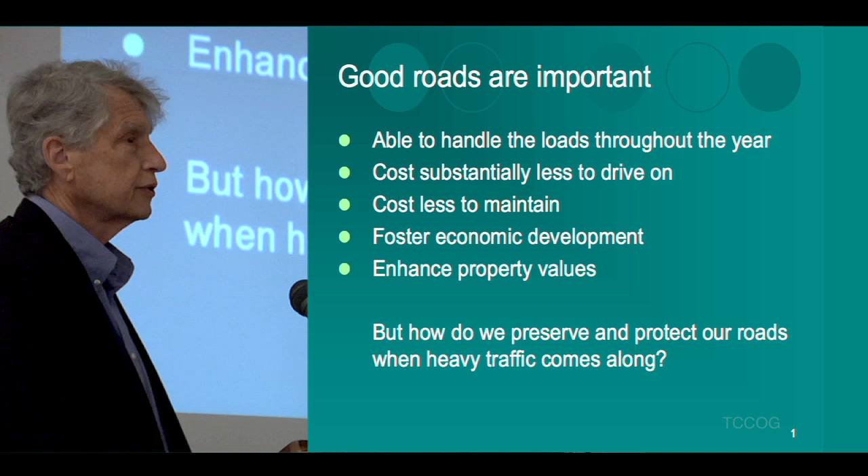Good roads cost substantially less to drive on. We refer to something called road user costs, and road user costs are how much it costs you as a motorist to go a mile down a given road. That's very much a function of the condition of the road, as well as certain things about how you operate your vehicle: how fast you go, how good the tires are, how good the shock absorbers are. But nevertheless, poor roads cost substantially more to drive on than do good roads. So that matters.

Good roads cost less to maintain. You can't totally ignore maintenance on good roads. They look pretty fine. Sometimes it's not intuitive to the public, maybe because we've trained the public to believe that the first time they're going to see the highway department is when the road's all broken up, and any high school kid could tell you that it was time to repair the road. But in fact, the least cost time to repair a road is when it's still in good condition. And then finally, good roads will generate economic development and enhance property values.

New York State is pretty well roaded. There's not a lot of new major routes that are going to be built in the future. Some subdivisions are still yet to be built, perhaps, and some standards on what the roads in those subdivisions should look like can be promulgated. But as far as adding to our road system, we've got about 110,000 miles of road in this state, and that hasn't changed much in the last 30 years, and it's probably not likely to change much in the coming 30 years. So we're pretty well roaded.

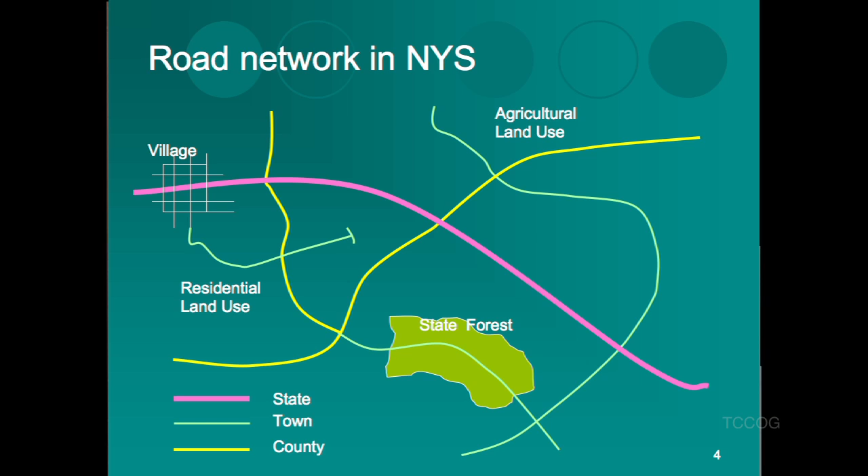And as you're going down a given road, you may be on a town road for a while and it may change to a county road. A town road could link to a state highway or it could link to a county road. You can have little villages, and villages have their own road systems, as do cities, and their own public works departments.

Perhaps near the village there's residential land use, houses fairly spaced out in the surrounding area. Get a little further out, you get into agricultural land use. Maybe up at the top of the hill is some state forest that's logged for timber and used for recreation, hiking, all sorts of different things. Maybe even some skiing in there. And the road system provides access for all these different functions.

But generally speaking, it's not straightforward. And when you're starting to figure out, well, what are going to be the consequences of traffic that was not originally anticipated at the time the road system was laid out and built, if we suddenly make a shift in the usage of that road, even for a short period of time, 3-6 months, we can use up a lot of the life of the road in a fairly short period of time if it's a weak road. If it's a strong road, like the state highway, it may not have any impact at all. You may not even notice the difference.

You can categorize roads by the administrative unit, whether it's owned by the town or administered by the town, the county, the city, the village, the state. We also use a functional classification system: interstate, arterial, collector, local. Roadside land use is another way of categorizing particularly the local road system. Local roads constitute substantially more than half of the total road system in the United States.

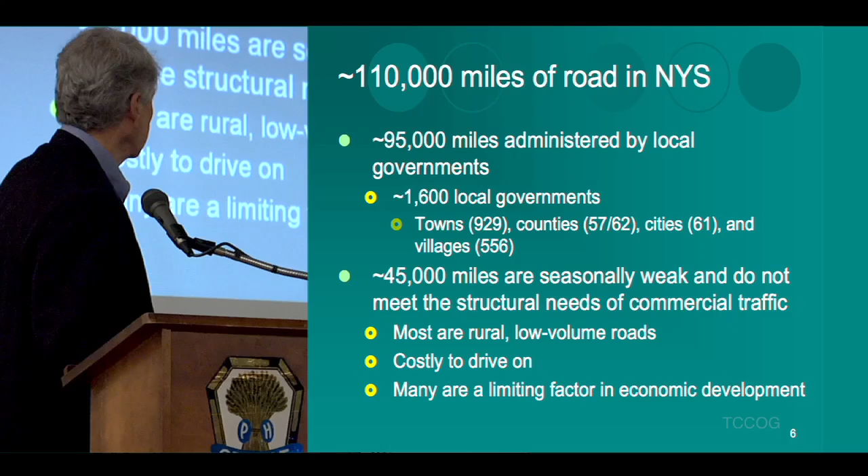So keep in mind that these roads are mostly rural. We call them low-volume roads. They're costly to drive on. Many have a limiting factor in economic development. One thing that came across my radar screen not that long ago was a time when we switched from hauling milk from dairies in single-unit vehicles, steering axle and a drive axle, to semi-trucks, steering axle, drive axle, and trailer axle.

And those larger vehicles had a hard time getting across weak bridges, weak pavements, tight alignments that weren't really ever engineered. They were roads that went from Bill's to John's barnyard and then on over to Pete's 100 years ago. And it was a pathway for a horse and buggy. And it got converted in the early 1900s into a town road. And along about 1990 or so, we switched over to using much larger milk hauling vehicles. Well, they couldn't maneuver these roads.

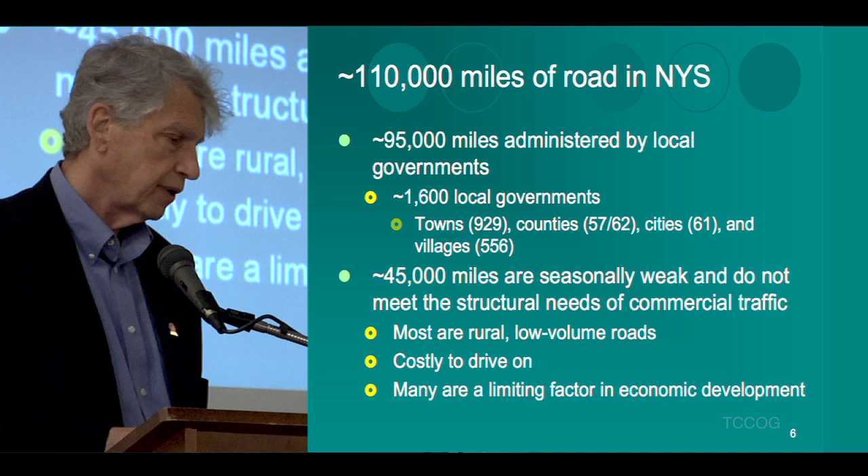So guess what? Some of you may be aware of the fact that Queen's Farms systematically dropped every dairy that was on a local road and went around signing up only dairies that were on main highways so they could get their trucks in and get their trucks out. Too bad for anybody that was in the dairying business that was off on one of these side roads. That's just one of many examples of how our road system, particularly the weak roads and the poorly aligned roads that we have, can be a factor in economic development.

How come nobody's interrupted me yet? Too early in the morning? Okay, let's do something together. I want you all to say the word something. Ready? 1, 2, 3. Something. Now you can go back and say you said something at the meeting. All right.

So, state highways. Generally speaking, the alignment of state highways was engineered, meaning that the layout, the alignment, its curvature, vertical as well as horizontal, was calculated. Pavement thickness was calculated. The traffic was determined and predicted in advance. And the pavements were designed to support a substantial number of very heavy vehicles.

Yes, sir? One question. So there was a report that came out some time ago from the New York State DOT predicting a certain large cost to the state due to heavy truck traffic. How does that jive with your statement that the state highways will be relatively unimpacted? What costs were they looking at? I suspect what you're thinking about was associated with the garbage hauling up into, where is it, Cayuga County, I think? No, this is a quote-unquote leaked document where New York State DOT was looking at the impact of frac trucks. Of frac trucks?

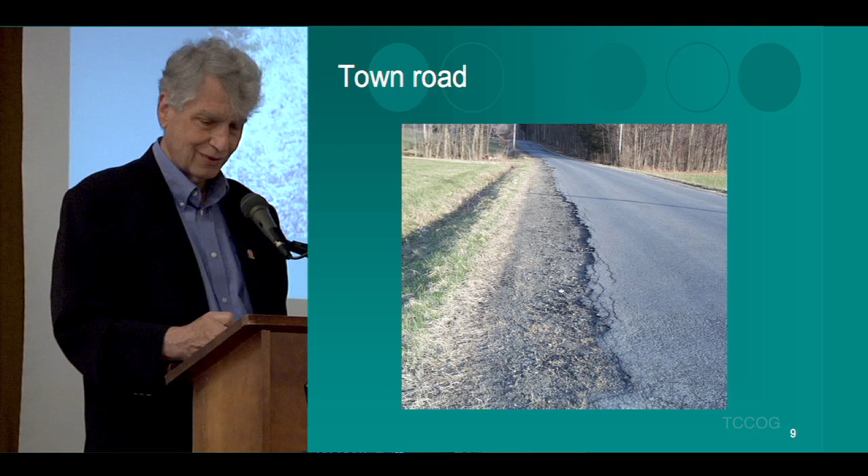What may not be obvious is water that runs off that road has a hard time getting into this ditch because of the accumulation of sand from winter operations of salting and sanding, and the grass grows up through it and actually causes the ditch to move over to right along the edge of the road, which is not a major enhancement of the lifetime of the road. Road strength isn't constant throughout the year. That's a principle that I'd like you to remember.

Local roads often are seasonally weak due to poor drainage, due to the use of low-quality materials. What do I mean by low-quality materials? Well, sometimes we open up a gravel pit and it's got a lot of silt and clay in it. Not ideal for serving as the base course for a road. It might have been fine once upon a time when that road was a gravel road. It had to have some silt and clay in it to hold the larger stones in place, give it a little bit of abrasion resistance and so on.

But it wasn't paved, so any moisture that got in there could come up through, the road could breathe, and it would evaporate away. Enough fines in there to shed water so that water didn't penetrate going down from above too much. But then we pave over it. We say, let's pave our roads. So we get out there and we put a thin surface, just a membrane.

And you've all had the experience of laying a tarp or a tent or something like that out on your lawn overnight in the summertime. Next morning you get up and you lift that tarp up, and what's dripping from the bottom side of the tarp but a whole bunch of water, right? So that's evidence that that water comes up. When it hits an impermeable surface like the plastic tarp or a sheet of paper or whatever, it condenses in the cool air and makes the area right beneath it very wet.

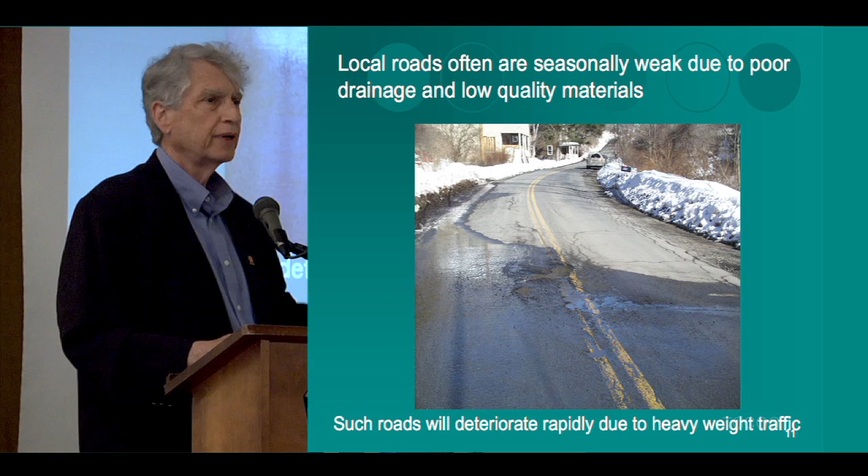You put together the combination of water and high fines content, high silt clay content of the materials, and you wind up with a situation where the bearing capacity, the structural supporting strength of the material, is very poor. So such roads deteriorate rapidly, especially if you have heavyweight traffic. And so we'd like to avoid creating any more of these if we can. What do we do about it? Well, we have to pay attention to the drainage needs of the road. Putting out cones doesn't make the water go away. We need some downhill.

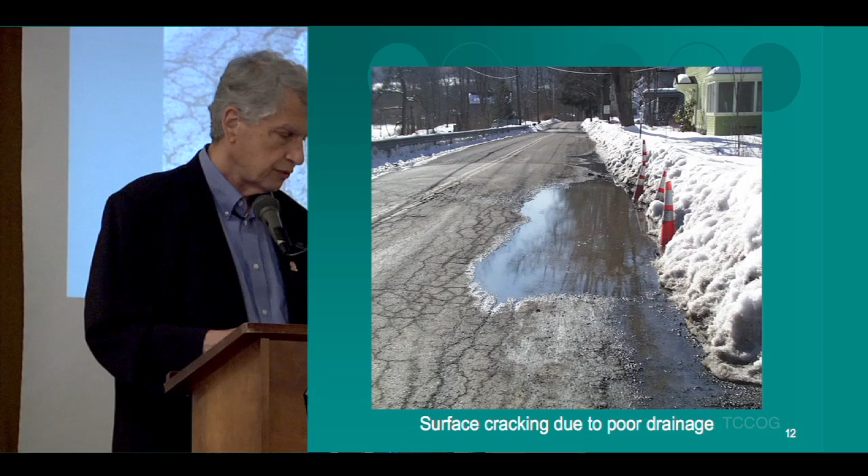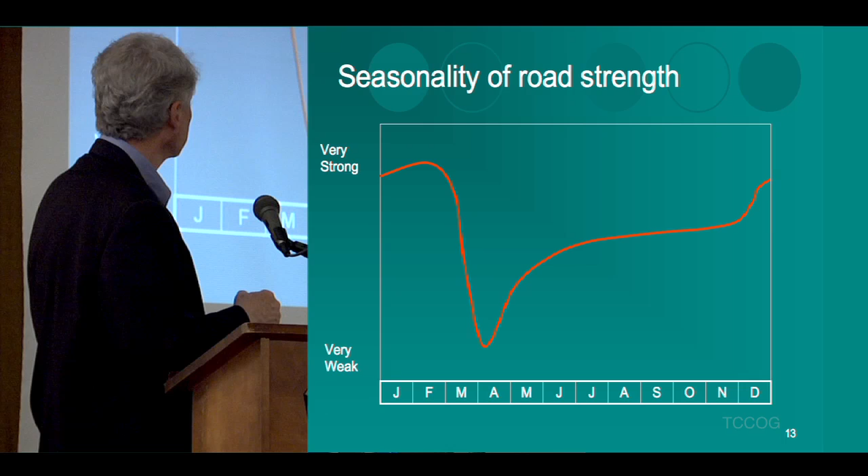You can see that the water has caused regional cracking in the area of the surface because of the combination of water and weak materials beneath the surface. And spring thaw aggravates that situation quite a bit. This is sort of a concept of how road strength or bearing capacity or load supporting capability varies with time of the year here in New York State. If we go from January to December, when the ground is frozen, the road is beaucoup strong, very strong.

Probably can't hurt it with the biggest loads you could throw at it. But then we get into a period of weakening with that interaction between water and thaw. Generally roads thaw from the top down as well as from the bottom up. And so you wind up with a situation where there's high moisture content in the road, and then a still frozen zone, and then a never frozen zone. And that still frozen zone prevents water from going down, and it's usually too cool to promote any evaporation of consequence. And so it's sort of like trying to drive a truck on a waterbed. It doesn't work too good.

But gradually over time, as we go through the spring and on into the summer, there's a continual increase in strength until we get frost penetration back down in the road again, and it goes up to very strong. That's pretty much what happens. So when we drive a vehicle on a road that exhibits this kind of characteristic, it makes a whale of a difference how much damage a single pass of a given vehicle would make, whether it was right here at the bottom of spring thaw, or whether it passed right there at the top of the frost season.

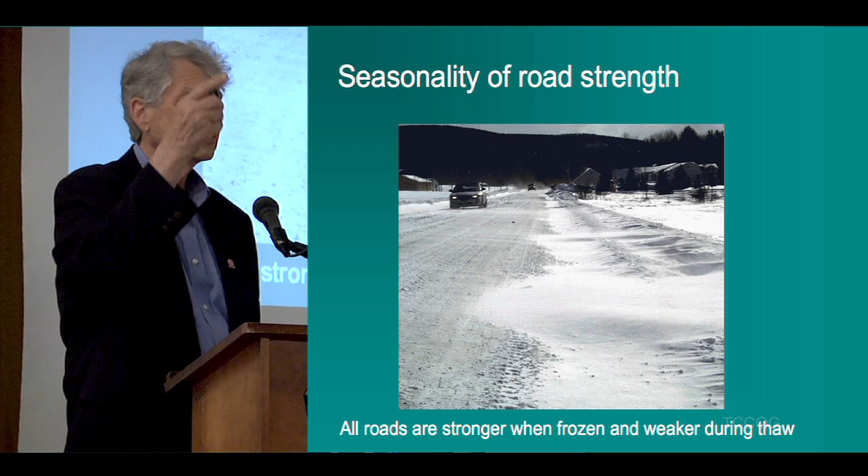All roads are stronger when they're frozen and weaker during thaw. That's true of state highways and local roads and so on. Just the magnitude of that difference between winter and summer is a lot more noticeable on local roads. So, the damage per pass of one truck is not the same on strong state highways versus weak local roads. The damage per pass of one truck is not the same at different times of the year on a given road. And thus, cost allocation, when we try to figure out what the bill to the user of the road should be, cost allocation based on the number of truck passes is a flawed approach.

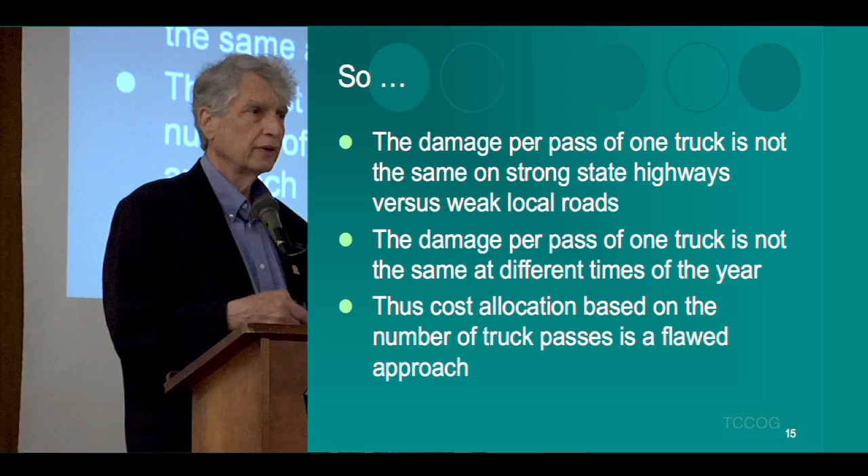And to the best of my understanding, that's exactly what Pennsylvania is using. They just said, tell me how many truck passes you're going to have, and we'll tell you how much you owe us for damage to the road. And I'm saying, well, now wait a minute. It makes a heck of a lot of difference whether those trucks went over in December or whether they went over in March as to how much of the life of the road got used. So we need to get a little bit more sophisticated, I think, than just a cost per trip or damage per pass or a cost per pass type of approach.

Roads deteriorate over time. This is referred to as the performance curve. Now our time span is in years, and that could vary from one category of road to another. For a state highway, the time from real good condition to totally gone to pot might be 30, 40 years. On that chip sealed town road that I was showing you earlier, it might be 3 or 4 years. So a lot depends on the structure that's there, what this time scale is, but all roads tend to follow this kind of a pattern: when they're new, they stay in pretty good condition for about 2/3 of the life of the road. And then the effects begin to become evident. And finally, as we get down into what we refer to as fair and poor condition, we begin to see visible distress.

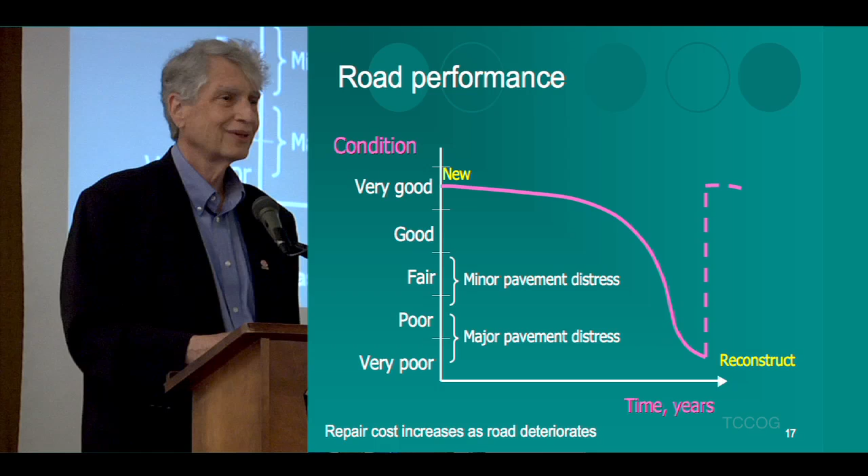Yeah, questions? So my point is that this road performance curve works for all roads, whether they're interstate highways or town roads, but they're assuming a certain amount of weight that they're carrying or a certain amount of stress that they're seeing. And if you change that stress to make that consistent between all roads, then the curve would be much shorter than it is for a town road and would be much longer for...

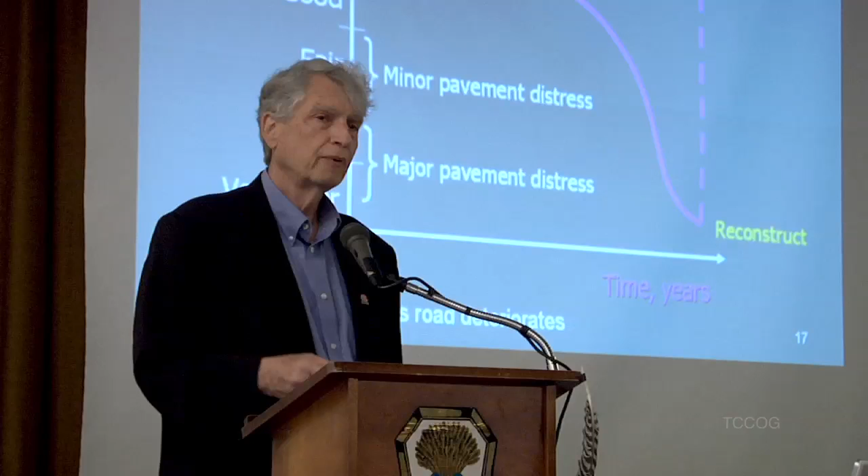As I pointed out earlier, it is the case that 15,000 miles of road that's administered by the state has a huge force of people that figure out what needs to be there. But what do we do with county roads and town roads and village roads and so on? Well, there hasn't been too much change in traffic over time. There's 1 or 2% growth per year in a high growth area and less than that in a standard growth area.

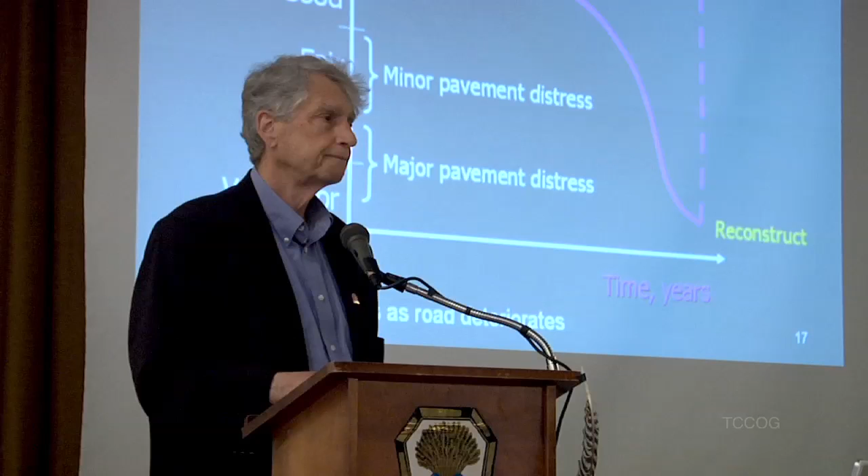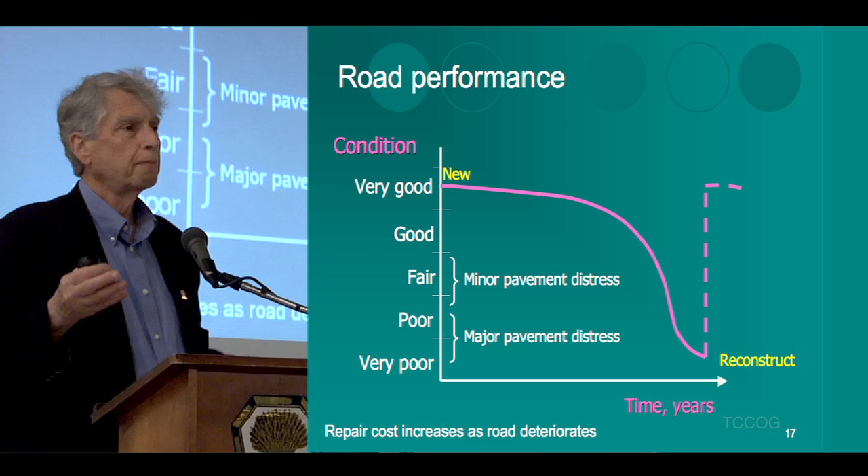So we gain from experience, and we know what we need to do, and we have a pretty good sense of how long it's going to last. So the person in charge of the road system does what is needed when it comes time to reconstruct or recondition a road, does what's needed based upon past experience.

If after that commitment has been made and the taxpayers have forked over their money to build that road, then there's suddenly a jump in particularly the heavy truck traffic, even for a short period of time, like 6 months, which is about how long it takes to develop a wellhead, you wind up with a situation where you can use up a pretty large portion of the life of a road under those circumstances. So the engineered road isn't as adversely affected as the ones that are designed by experience.

And one other follow-up question. Typically, local governments don't let the roads go all the way to the point where they need to be reconstructed. So what would this curve look like if you were to do some intermediate repair or resurfacing? Well, it depends on what you do for the intermediate repair. If you do crack filling and patching, that's not going to add much structural strength to the road. And in fact, it's probably going to add roughness to the surface.

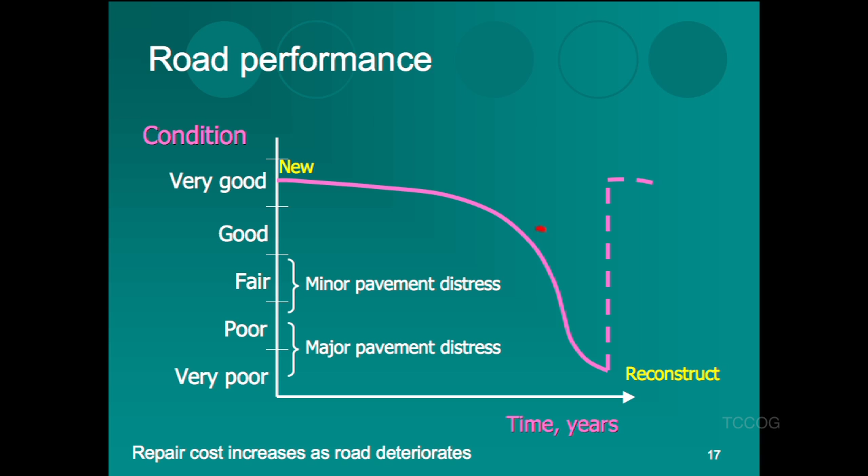Thanks. Okay. The thing I'd like you to notice is that here, the distress doesn't begin to show up until you get over into the last third or so of the life of the road. And Don's right. If you repair that road, put it back up to good again, smooth and good and very good condition, here it costs less to do that than if you wait until it's badly deteriorated and then try and do it. Yes, sir?

If I understand what you've just said, if you wanted to charge the trucker for the decrease in lifetime of the road, it would not be enough just to measure the decrease in the quality of the road. You'd have to know where on this curve you were, which might be tough to do. And there's a better curve that you could work with. We'll work our way toward that better curve here in a few minutes.

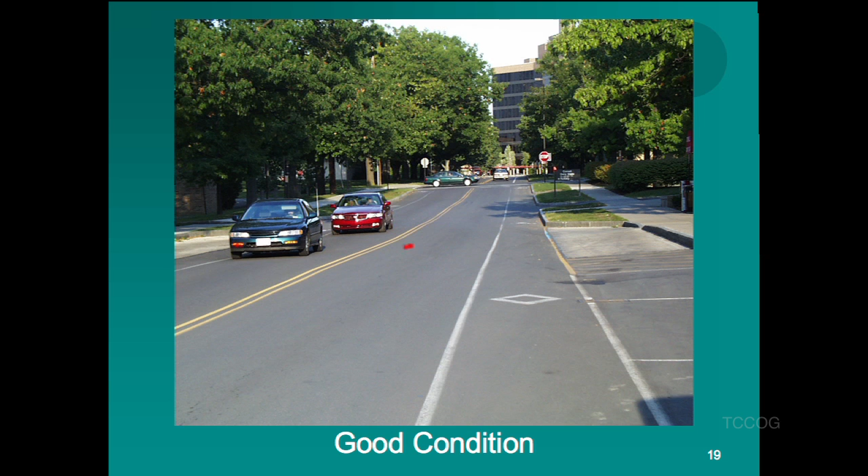Not too much different between very good and good. There's the occasional little crack here and there. If you look very carefully, you can begin to see some rippling in the surface. That adds a little bit of vibration, a little bit of roughness, a little more wear and tear on the traveling vehicles than they would have if it was perfectly smooth.

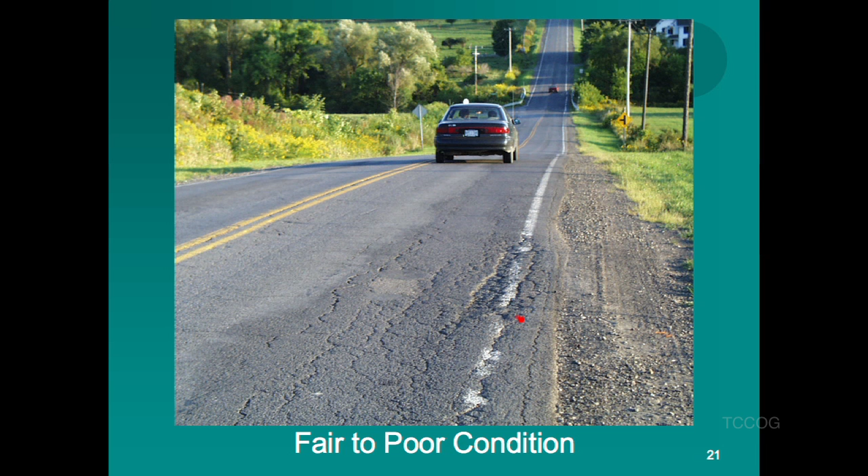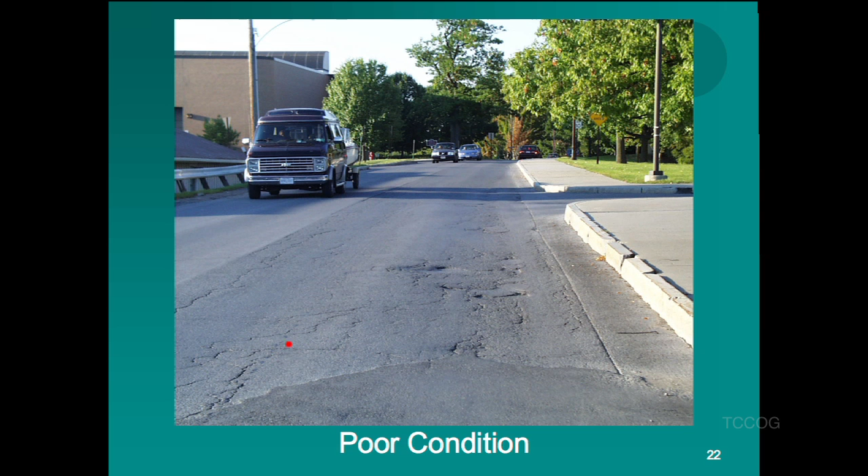This is definitely getting into the poor condition. There's a big patch that I'm standing on there, and some pretty significant roughness. Longitudinal cracking, transverse cracking, pothole. So that's about what you'd call poor.

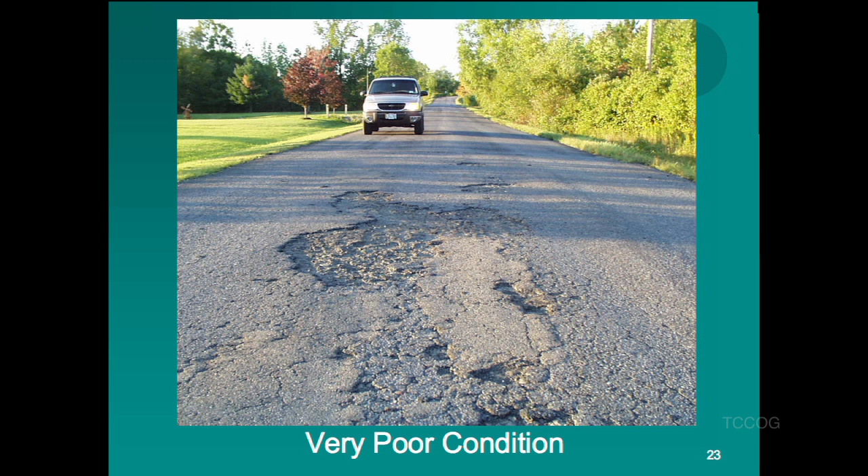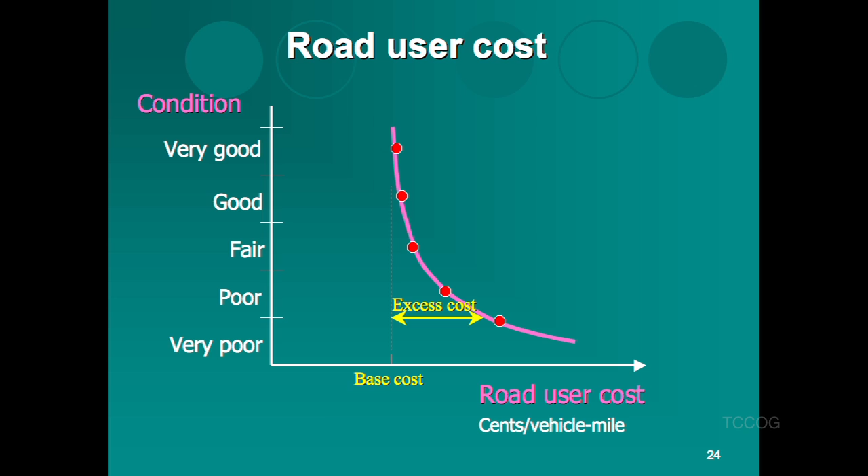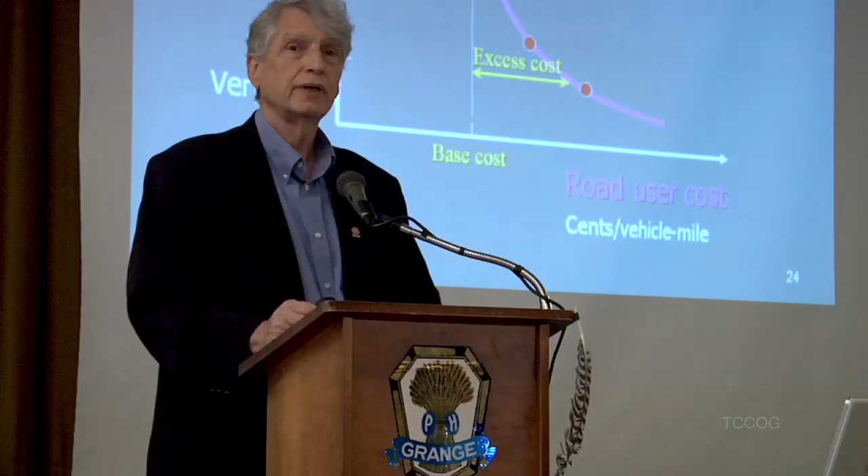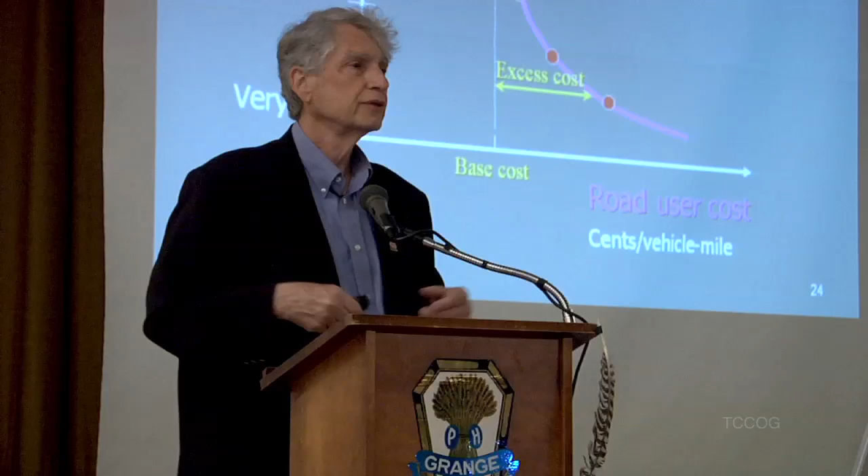Another question? So, the highway department spends money to build a road and maintain it. Road users spend money to drive on the road. Vehicle depreciation, gas, oil, tires, new shock absorbers every now and then, so on and so forth. How many here would say that the road user cost is 50% or less of the sum of the two parts? How much the highway department spends to build and maintain the road, plus how much the road user spends to drive on the road.

All the traffic collectively. 50% or less is road user costs, 50% or more is highway department costs. How many would go there? Couple. Okay. Wrong. Too low. I know, I sucked you right in, didn't I? So let's bump it up here.

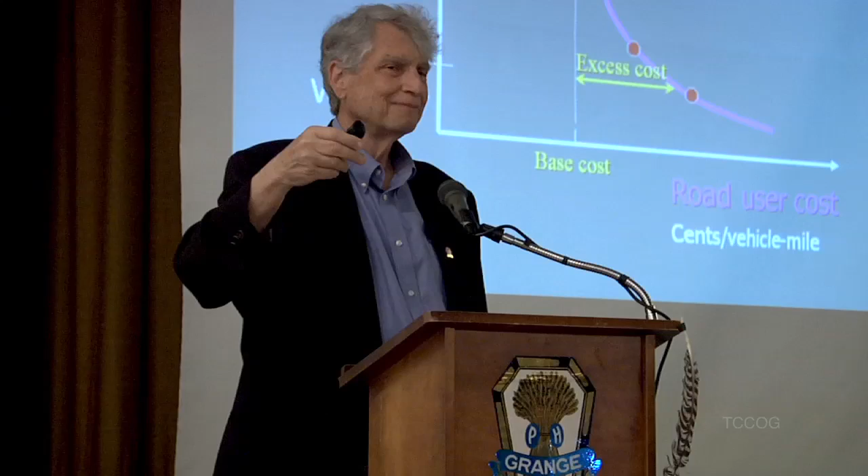I'll tell you that we're too low at 50% road user costs. How many of you would go with 75% road user cost, 25% highway department? Now how many of you have we got in the game? Plus all of those that raised their hand earlier, right? Because you're covered. Okay, still wrong.

Shall we go for 90? How many of you would say road user costs are about 90%, highway agency costs are about 10%? Show of hands. Not very many. How many of you say it's more than 90?

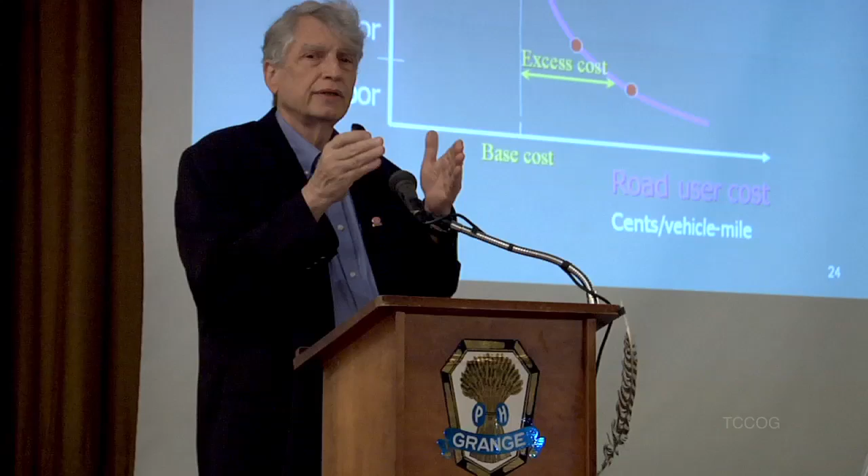Well, it doesn't make too much difference whether we're talking interstate highway or whether we're talking town road. It ranges in a fairly narrow band: between 90 and 95% of all the costs of going on a road is road user costs. 5 to 10 cents on a dollar is paid for by the agency, spread out over a substantial number of years.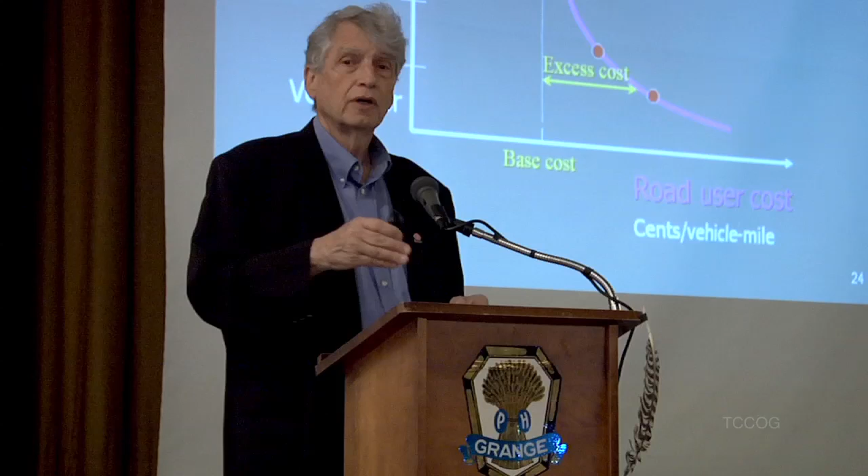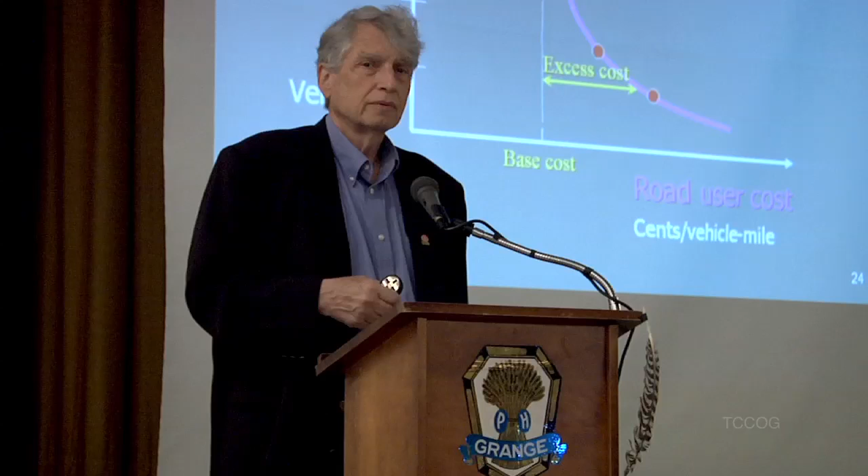And so when I see a road in very poor condition, my wallet begins to twitch and I begin to say, please, please, please spend a penny of your damn nickel to make my 55 cents per vehicle mile go down to 45 cents, if you would, please. And it turns out to be very cost effective to keep roads in smooth condition.

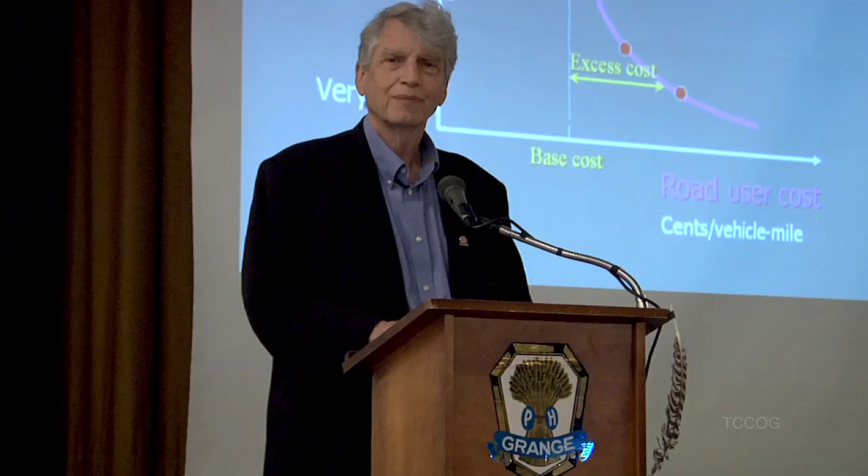But how on earth would you explain, with all the training we've given the citizens of New York State, that we don't come out and fix roads until they cause complaints? How would you explain to people that you're out there repaving a road that looks perfectly good? Be tough, wouldn't it, when there's other priorities? Those roads have to compete for funds with other priorities. So we can let it go.

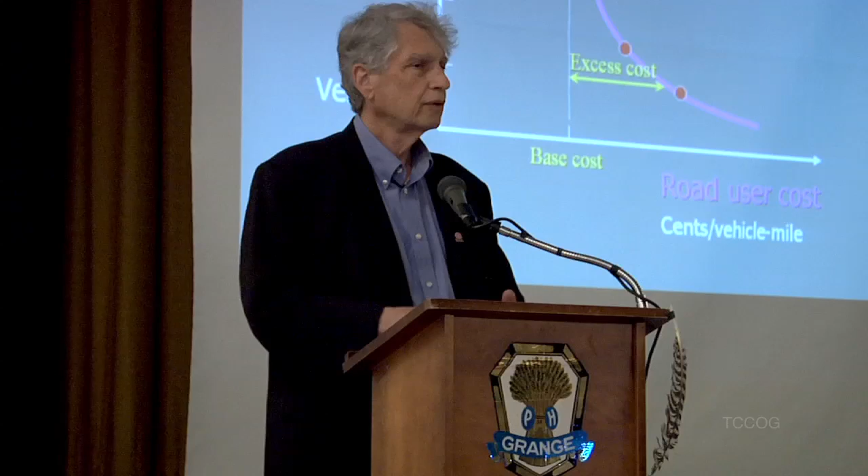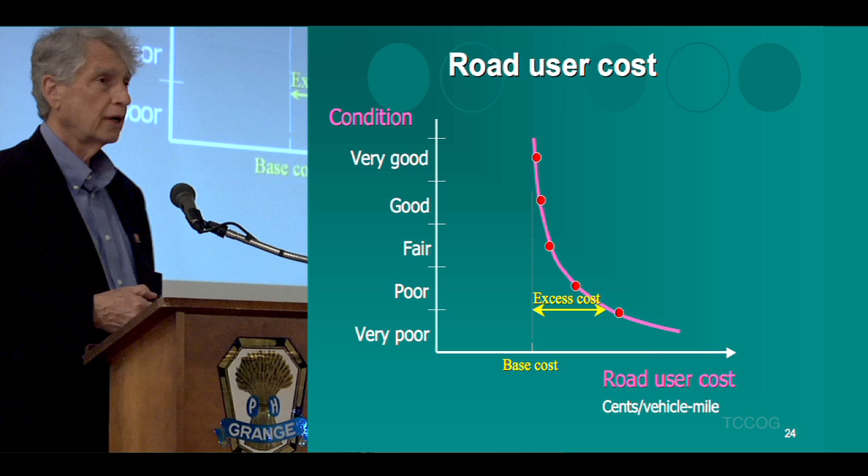But the consequence of letting it go is this excess road user cost. If the public knew what we're doing to them in terms of excess road user cost by having weak and deteriorated roads, they'd probably get pretty concerned. So I was planning on sending an article into the Syracuse newspaper to tell everybody this.

So basic engineering principles. What causes road failure? Heavy loads, lots of traffic, seasonally weak materials, poor drainage, and just the passage of time, which in engineering parlance we call cumulative damage. All of these cause that condition curve to take a dive eventually and go from good to poor condition.

What's going on in the roadway underneath the vehicle tire? Let's think of it as a truck tire. It's got a tire pressure that pushes on the surface and an axle load that pushes on the whole system, which bends the surface, bends the base course, and puts a vertical pressure on the subgrade. Heavy loads cause big deflections. Why do we care? Because big deflections cause roads to not last very long.

So why are our state highways able to withstand lots of heavy trucks and town roads aren't? Well, they put more substance in there. They typically use better quality materials, and they sure as heck put them down a lot thicker. I and my colleague David Orr have been out coring roads around New York State on state highways for a research project over the last few years.

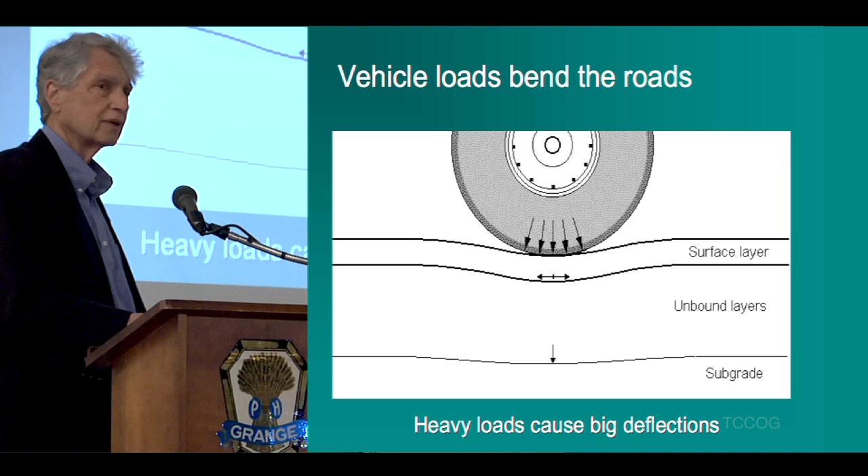The biggest that we came to was 17 inches of asphalt concrete that had been accumulated over time on roads that were perhaps first paved around 1930 or so, but you'd see a layer and then another layer and another layer, and by the time you cut a hole in it, it was 17 inches deep. And that was just the asphalt. And underneath that was a heavy layer of unbound gravel as well.

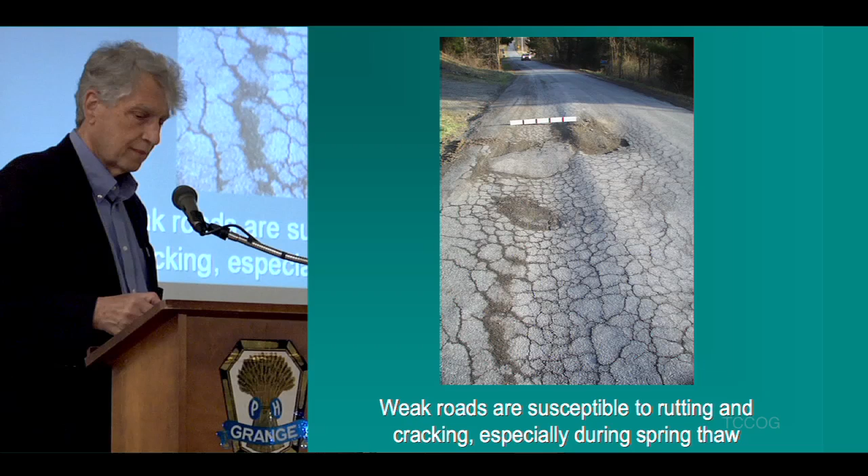So what happens when weak roads are subjected to heavy trucks at the wrong time of the year? You get rutting and cracking. And this is a particularly good example because it's got cracking and rutting and potholes and patches. By golly, this is classic. Used to have a colleague that said no student project was ever a total failure. It always could be used as a good, bad example. And I think this is, without any doubt, a good, bad example.

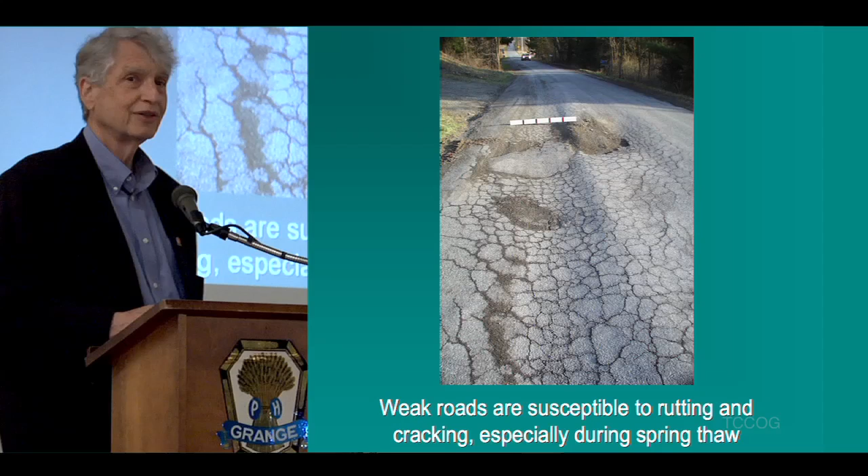So let's think about something that you've probably done absent-mindedly, just sitting at your desk. You took a paper clip and bent it back and forth and back and forth, and pretty soon you had two halves of a paper clip, did you not? Anybody here who has not yet done that? 100%. Okay, we have something we can talk about together then.

So you took a paper clip and bent it till it breaks, but let's make it a little more complicated. Let's take a dozen paper clips and have three conditions. One, we open it up to 45 degrees and then fold it back down. Take a different paper clip out of the pile, open it up to 90, bend it back down to closed. And then another one, 135, which is 90 plus 45, and bend it back down.

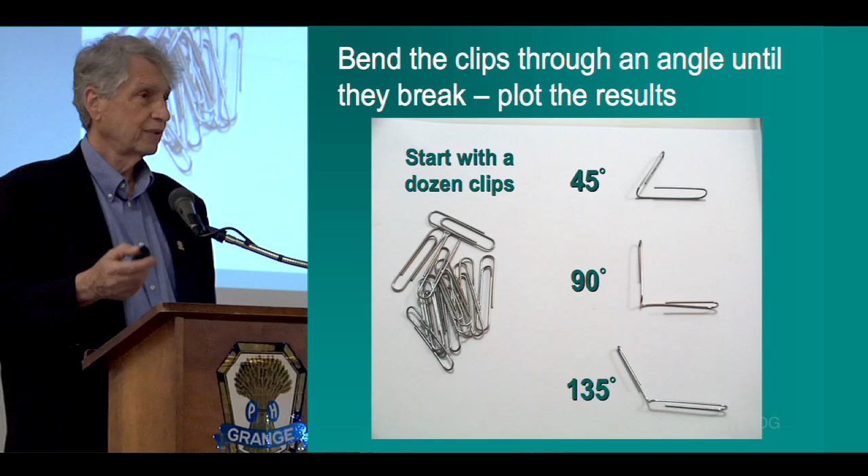What do you suppose is going to happen? Eventually, they're all going to break, but the one with the bigger angle is going to not take so long. So here's what it looks like.

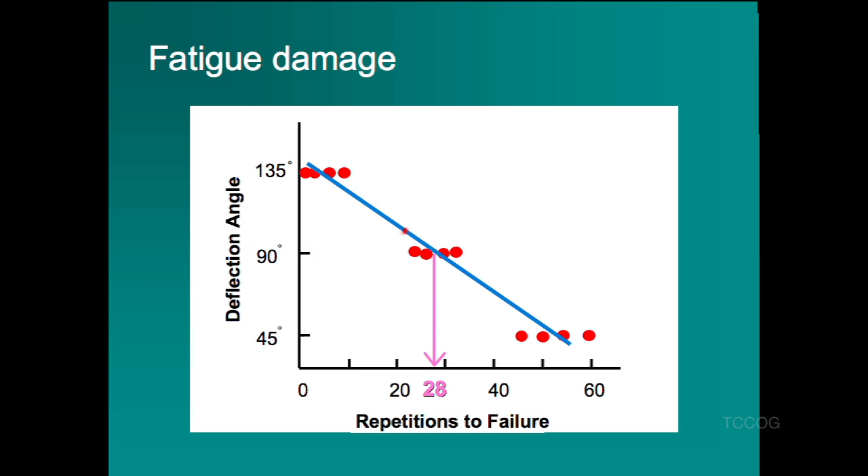At 135 degrees, just a couple of bends back and forth, and it's kaput. At 90 degrees, it lasts a little longer, and you'll notice how the data is scattered. In other words, a statistician would say it's stochastic. You don't get the same number of repetitions to failure out of every paper clip. But as a group, you can begin to find an average.

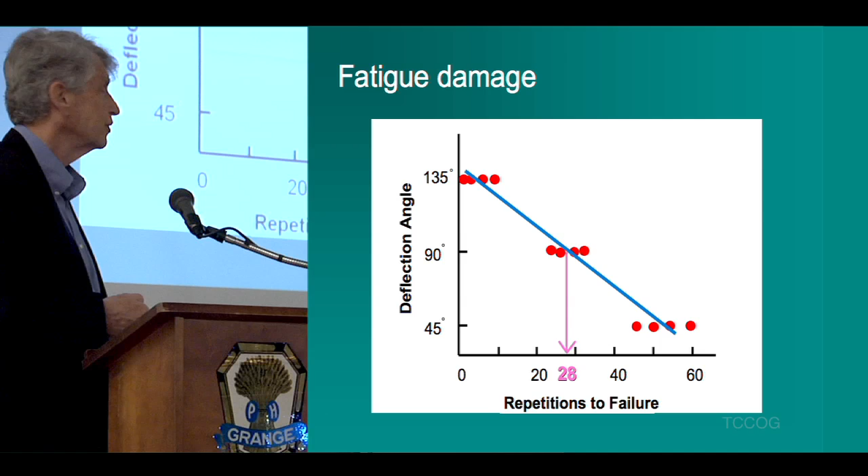So the blue line represents the average. And the average at 90 is about 28 repetitions to failure. These are the big, hefty paper clips, not those cheap little things with notches in them and so on. Okay, so now let's make it even more fun. Let's bend one paper clip 10 times at 90 and 22 times at 45. Who can tell me whether it'll break or not?

No? What makes you say no? Who said that? You're right. Here's how I know that you're right. We'll take that curve. I'll discard the data points because we don't need them. We'll just work with the blue line. So at 90, we could allow 28, but we're only going to put on 10. So 10 repetitions out of 28 allowable is 36% of the life of that paperclip.

Now we'll bend it to 45. We could expect to get 52 repetitions, but we're only going to give it 22. Remember, back here? 22 of these and 10 of those. So 22 divided by 52, and the sum of those two adds up to 78%. That's the cumulative damage. It's stochastic, so it might break at 78%, but that's far enough away from the line that I would be willing to put my money on that it wouldn't break. So you're right. You see how that works?

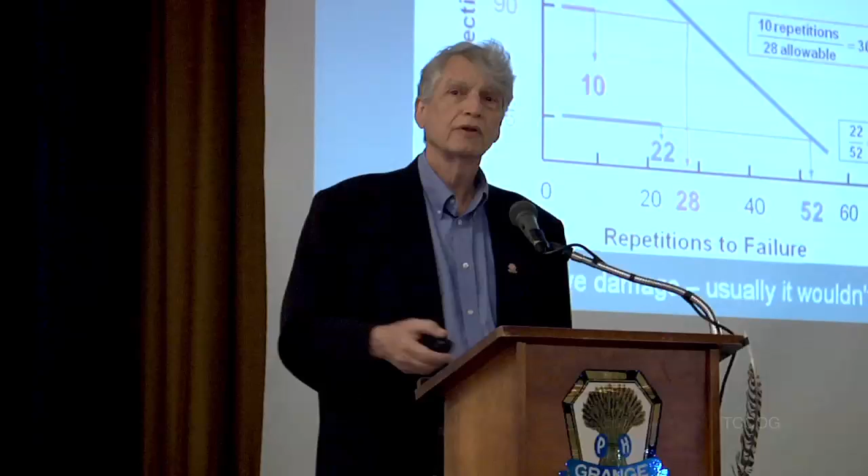This could be a heavy truck, this could be a not quite so heavy truck, that could be a Volkswagen. But depending upon the vehicle, the amount of damage per pass of the vehicle differs as a function of the loading.

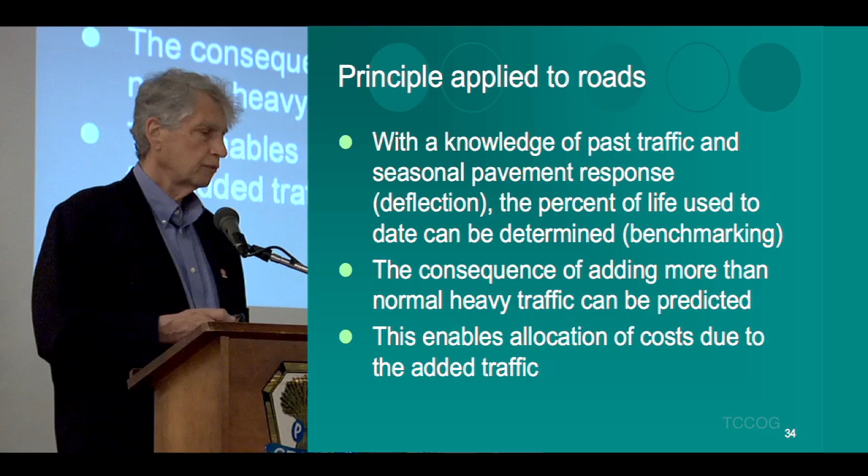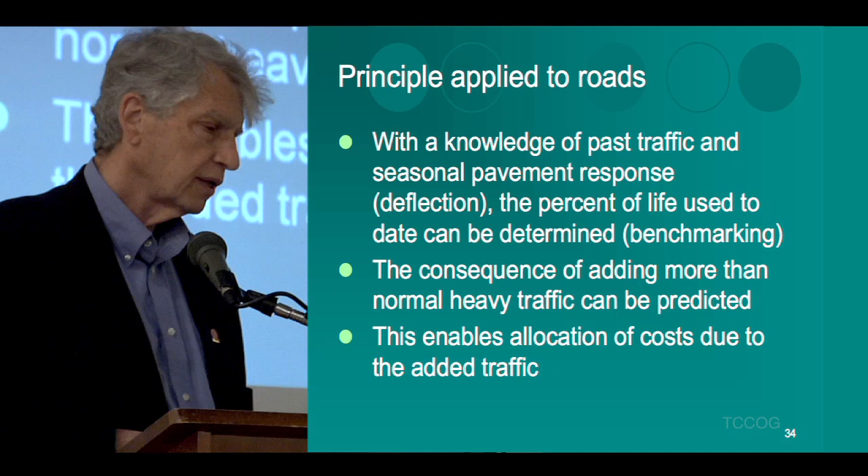So, when you try to apply that principle of the paperclip to a road with the knowledge of past traffic and seasonal pavement response, and pavement response is just fancy words for the deflection of the road, the percent of life used to date can be determined. And that is what I refer to as benchmarking. The consequence of adding more than normal heavy traffic can be predicted, and this enables allocation of costs due to the added traffic.

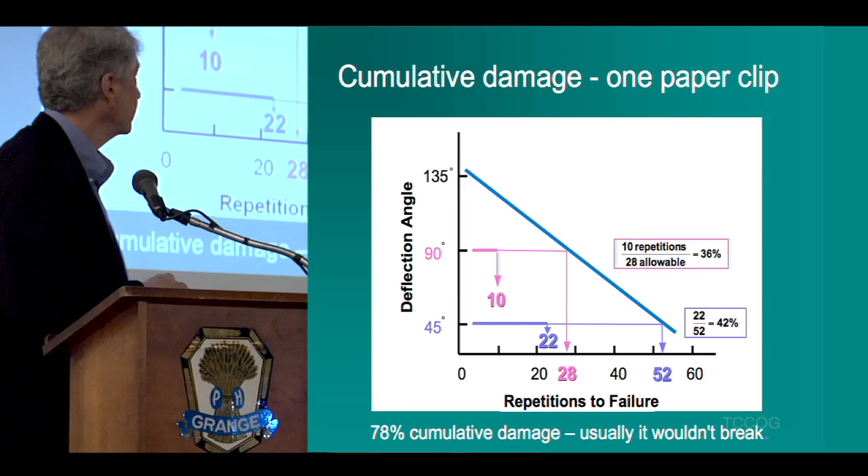Okay? So we have a mechanism here. If we have this kind of information for the materials, and if we have a means of measuring the pavement deflection or the pavement response, now we can get into something that's got some science behind it that makes it possible for us to figure out what would happen if we had a burst of heavy traffic superimposed on top of the normal traffic. And we could see how much of the life of the road is used by the heavy traffic and how much is going to be used by the remainder of the traffic.

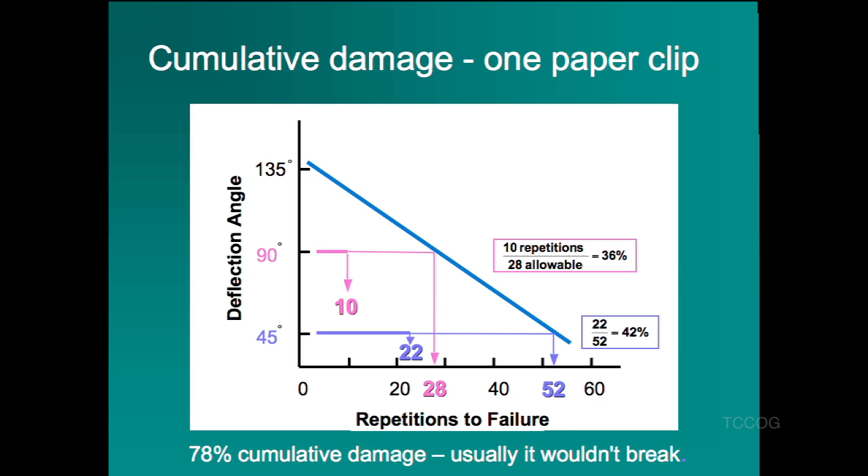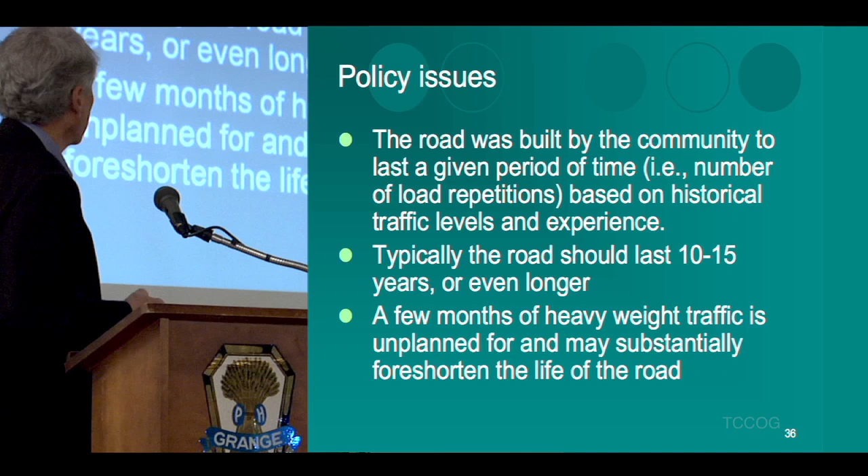Now we need to talk a little bit about policy, because while there's engineering that influences things, policy as developed by policy-making boards has an impact too. As we mentioned earlier, we got a road that's built by the community to last a given period of time. Or instead of period of time, we could talk about it in terms of number of load repetitions. One would translate to the other. And that's based on historical traffic levels and experience. So the reason why we have 3 inches of asphalt and 12 inches of gravel is because that worked over the last 25 or 50 years.

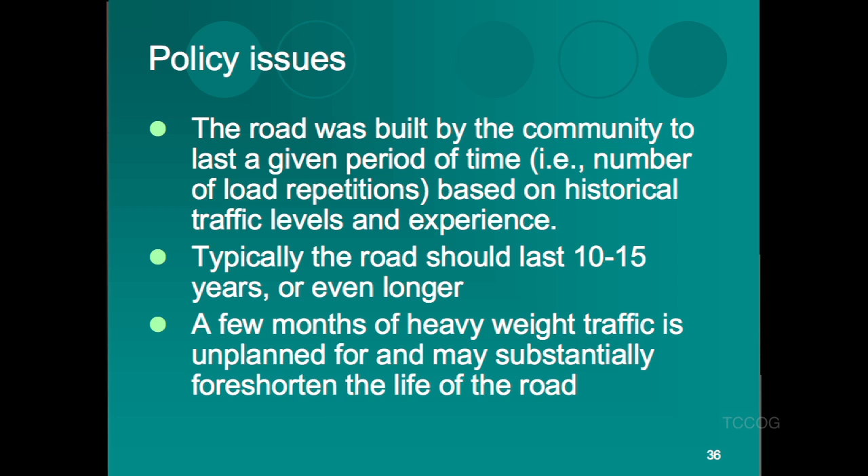Typically, what we do is designed to last, or expected to last, 10 to 15 years, or perhaps even longer. But a few months of heavyweight traffic is unplanned for and may substantially foreshorten the remaining life of the road, whether we're really going to realize the original expectation of 10 to 15 years. It'll be less than that.

So the policy aspect of it is the taxpayers aren't actually going to get the full life of the road due to the unexpected heavy traffic. Should the taxpayers pay for the lost life, or should the road user, particularly the one who's putting the heavy traffic on, pay for it?

When and how much should the road user pay? Should it be paid before the first truck hits the road or after the last one pulls off? What's the best strategy? And this cumulative damage concept is the key.

Question? So my understanding from listening to you speak before, and being my neighbor and having walked the roads with you as well, is that local roads that are not designed can actually take very few truck trips. Can you talk about general load carrying capability of an interstate highway versus a state road versus a county versus a town? How many trucks they could take? I know you speak in terms of ESALs, and maybe you want to define that term. Yeah, I was not going to get into ESALs today, but I can.

ESAL is an acronym for equivalent single axle load. We can take a mixture of traffic, everything from Volkswagens to overloaded trucks, and translate them into an equivalent number of 18,000-pound single axles, which was used in research back around 1960 or so. That makes the computations more simple. We can talk in terms of how many ESALs wellhead development is going to apply, how many ESALs the road can expect to last. Instead of years, we can talk in terms of repetitions of load.

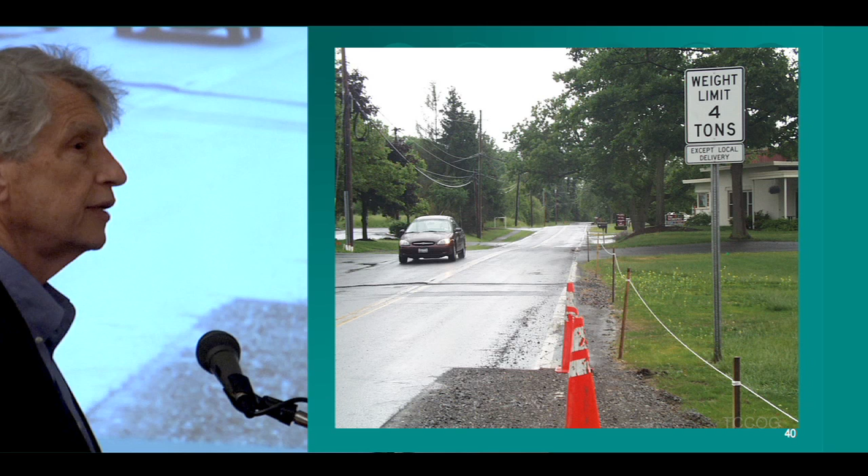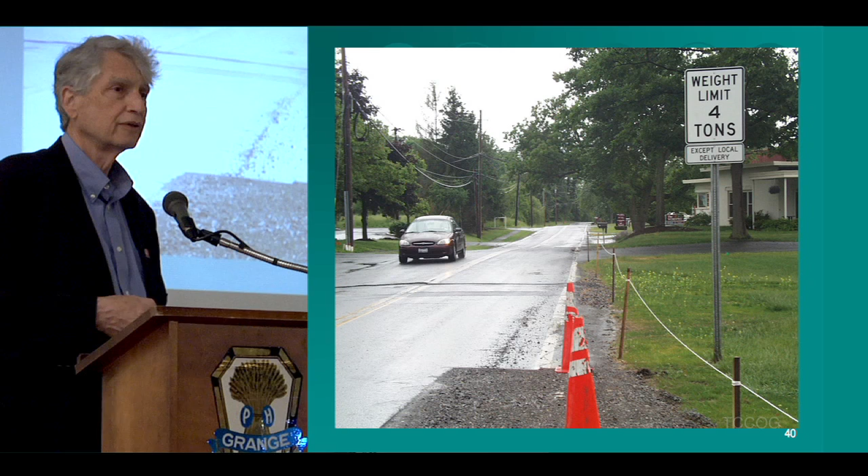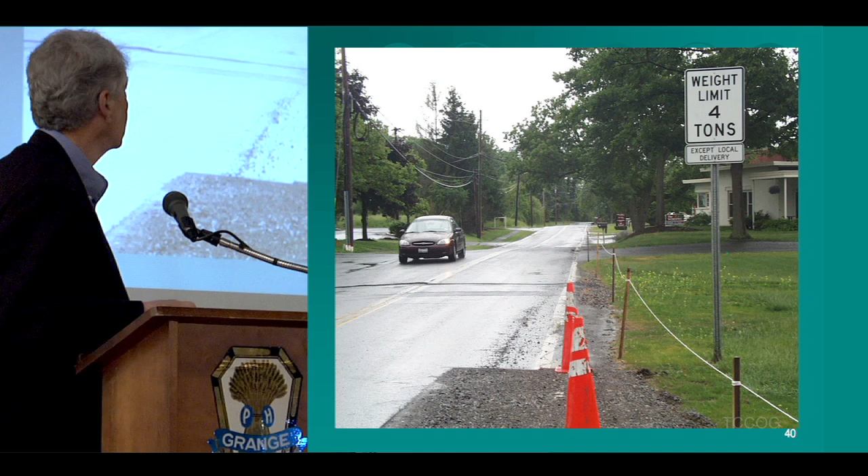What regulatory measures are available to you? Well, obviously, wrong button. Load limitations is one thing you can do, but that impacts on everybody. The traffic that the road was originally developed to be used for, how many school buses are less than 4 tons? Not very bloody many. How many garbage packers are under that? How many fuel oil trucks are under that? So you kind of need to be cautious about how you implement policies in this regard, or you can have a huge negative impact on the local economics.

I'm not going to go too much into the authority because that's the subject of the next speaker, and I promised him I would only just kiss this. Authority is conveyed to municipalities via several state laws. One of them, of course, is the Municipal Home Rule Law, which specifically allows towns, villages, and cities the power to adopt local laws relating to the management and use of its highways, roads, streets, and property. That's pretty vague. Town Law 130 authorizes town boards to establish a permit system allowing work in the right-of-way to construct pipelines, whatever, driveway entrances, and so on.

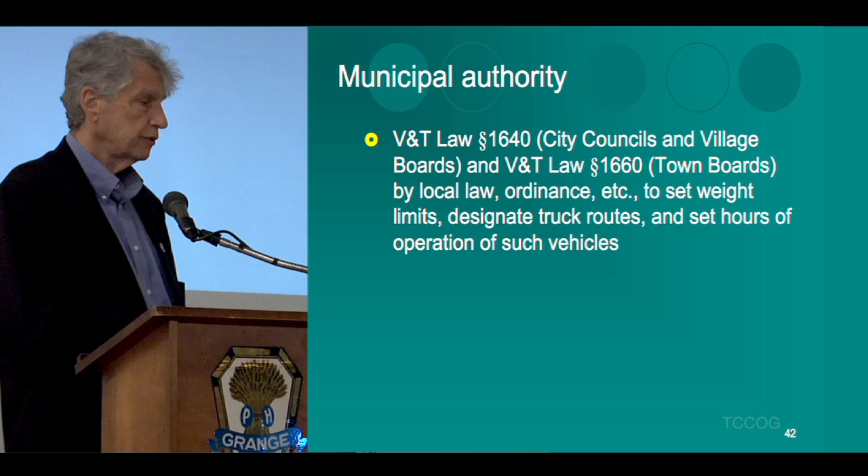More meaty is a set of laws in the Vehicle and Traffic Law that need to be adopted by local law or ordinance that enable you to set weight limits, designate truck routes, and set hours of operation for use of such vehicles. So you have the authority. And you really don't even have to write your own laws to do that. You can just cite and adopt these sections of Vehicle and Traffic Law. Up on the web at the Cornell Local Roads Program website, and you can Google Local Roads Program or even just Google local roads, I think Cornell comes up top of the list. At our website, you can get a little booklet of model laws that you can use to adopt these ordinances.

One thing you want to be cautious about, I've seen some trigger points where they just say number of vehicles without any indication of what unit of time. 10,000 trucks over 10 years or over 3 months makes one hell of a difference. And then what 3 months are you going to do it? And so on. So you need to establish that as a part of your policies.

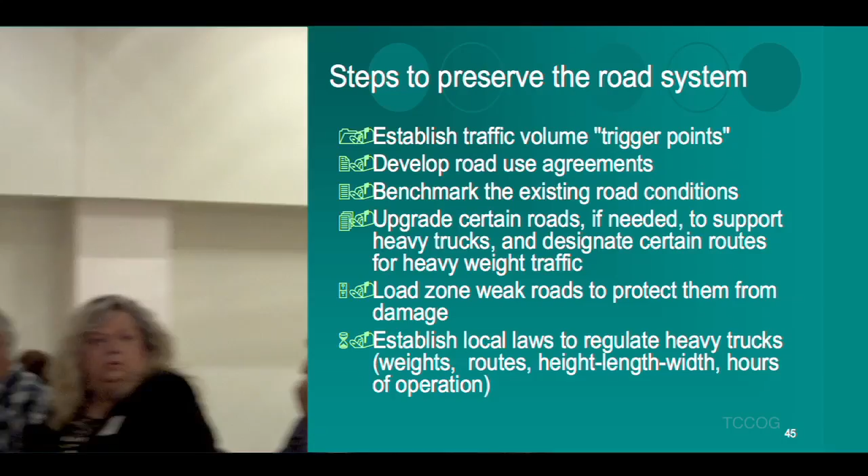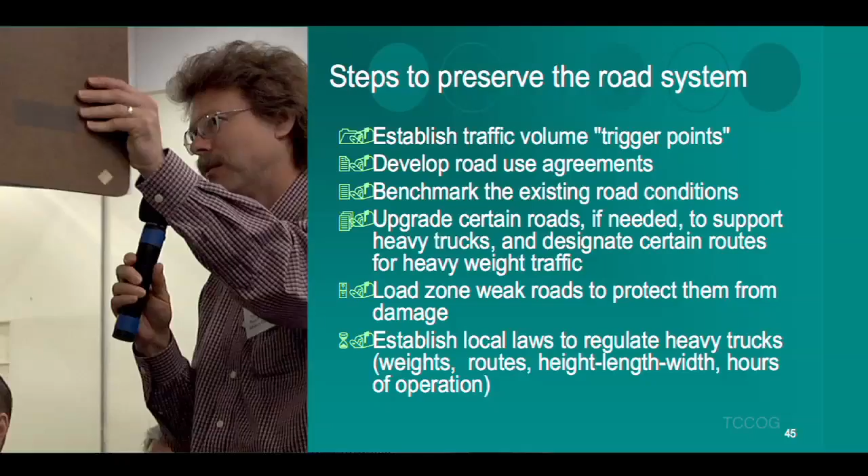So my question on the upgrading certain roads is, who's paying for that? Are you suggesting that's paid for as part of the road use agreement, or is that taxpayer dollars to get the roads ready for the traffic? No, I would say that that's a primary element of the road use agreement, is how much and when. Is it, if you want the money,

It's always somebody that forgets to put the phone on vibrate.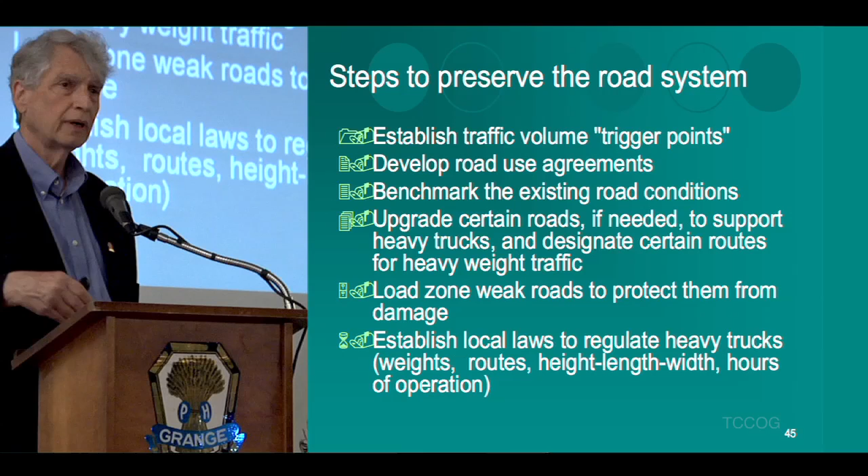If you need the funds to upgrade the road before the traffic begins, that can be something that the parties agree to or they don't agree to. You find that out in advance of giving the permit. It's an element of the permitting process. If you want to wait and have them provide their share of the cost of the road damage after the project is completed, that's another strategy.

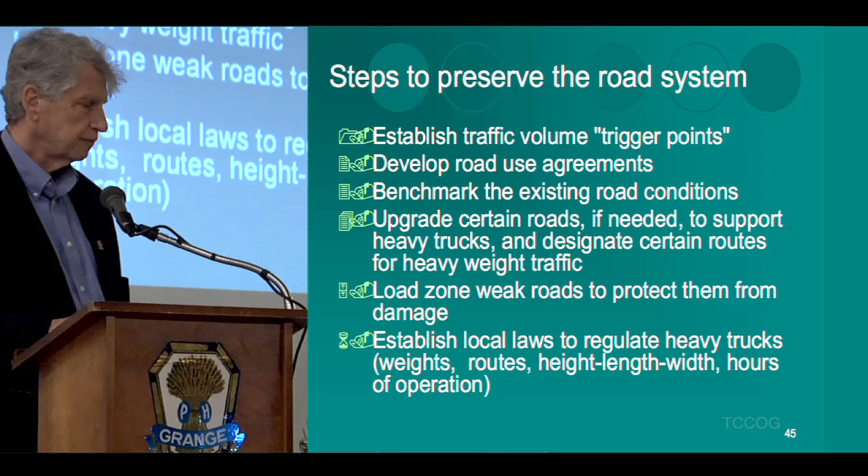There's the engineering answer to the problem, but there's also the policy issue, and this is where they get stirred together and can be symbiotic with each other. Okay, you load zone weak roads to protect them from damage, and then finally you establish local laws to regulate heavy trucks, their weight, routes, height, length, width, hours of operation, color of their truck, number of tires per axle, or whatever you wish to regulate.

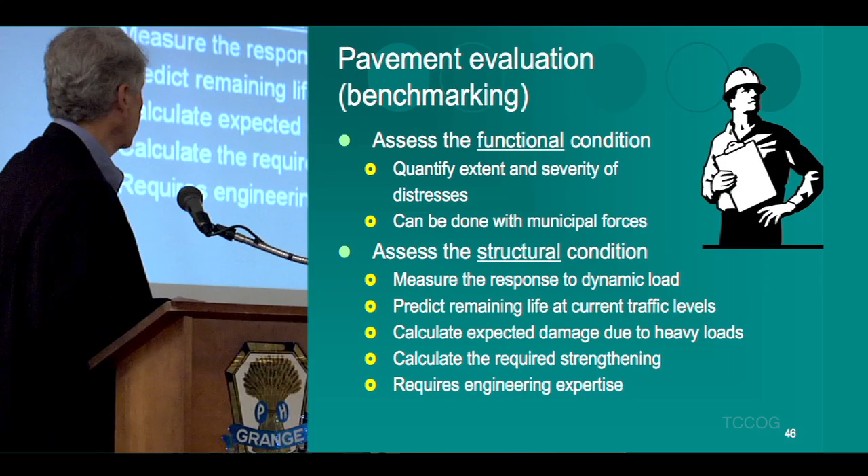And then the other aspect of it is to assess the structural condition of the road. And that's where the meat of this process of calculation and determination of cost allocation comes into play. In the structural condition analysis, you measure the response, that would be the deflection to a dynamic load, predict the remaining life at current traffic levels, calculate expected damage due to the heavy traffic, calculate the required strengthening if you're going to do it in advance, and that requires engineering expertise. You can't just do this with a pocket calculator.

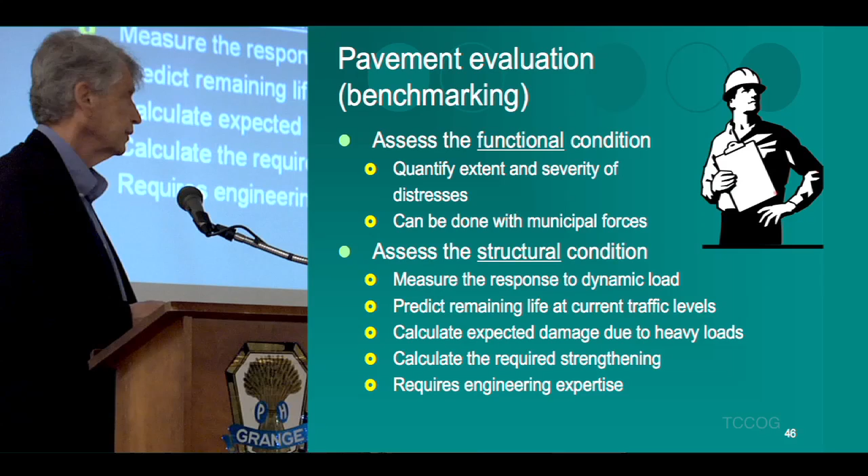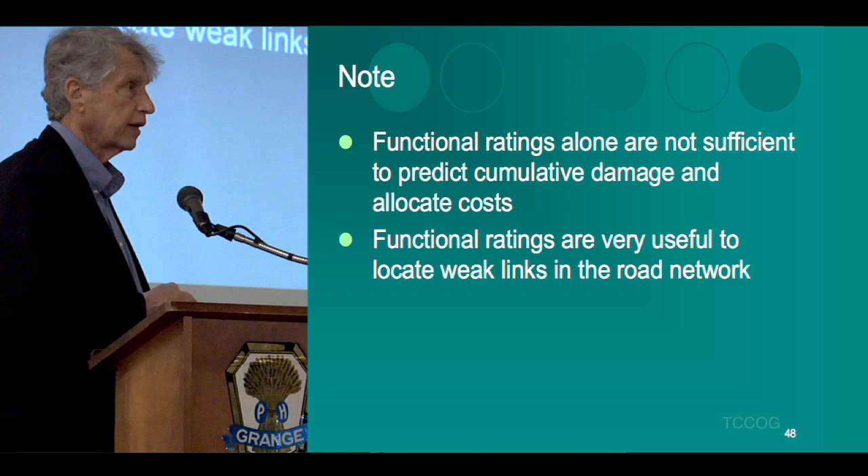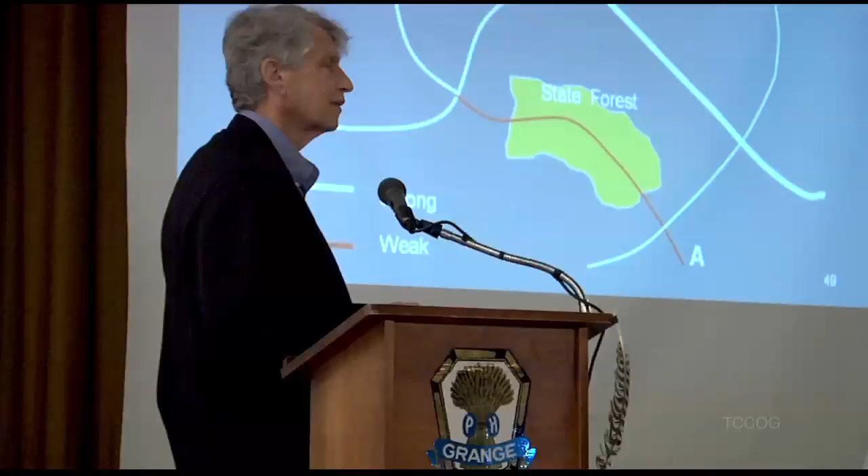And so... Wait a second. You can have a weak road in good condition for a long time if it has low traffic. True.

But still... I don't trust you after that hand-raising incident. Oh, really? Keep me honest.

Yeah, if you had a weak road and nobody drove on it, what would it look like after 20 years? Would it be as good as it was the day it was born, or would it be partially shot, even though nobody used it? Partially shot due to moisture. Due to frost heave more than anything else, because of the materials the road's built out of.

But look at point A down here. Got to get point A back. Point A, somebody wants to develop a gas well right there. And they have to go a little ways on this road that's in weak condition. And you probably wouldn't route them through the state forest. You'd probably route them out to the state highway and be done with them. After they're on the state highway, they're not your problem anymore. Look at point B.

Shortest distance to the state highway is down this road here, but it's weak. So you're faced with giving them access to this green road and going a little bit further, or strengthening this road here in order to make it feasible. That might be worth a lot to the developer to have a shorter route, and he might be more willing to pony up to help you strengthen that road than to spend all the extra travel time and money, especially if when he gets out to the state highway he wants to go in that direction.

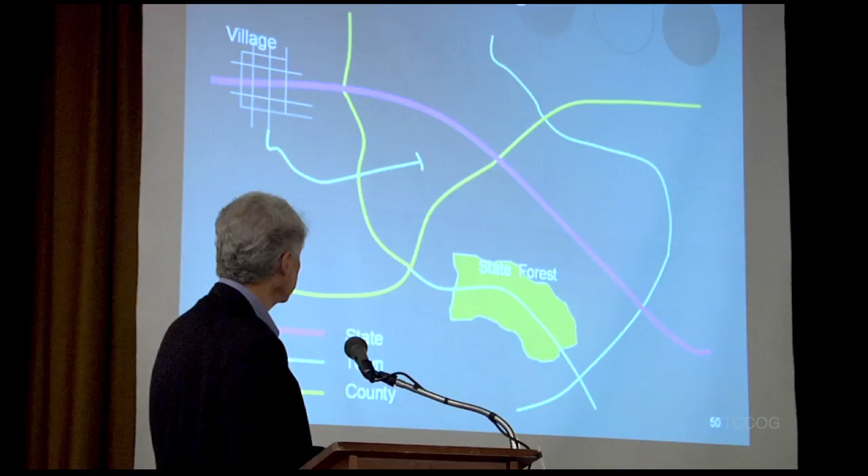Now, if we can do this just right, you'll see that down, whoop, damn it. Well, hello, okay, we're back.

The point that I was trying to make was that the same agency probably owns these two roads here. But over here, who's going to strengthen that road? The road permit probably will be issued by the town, but the road strengthening needs to be done on the county road. If you look the way I drew that, you see that?

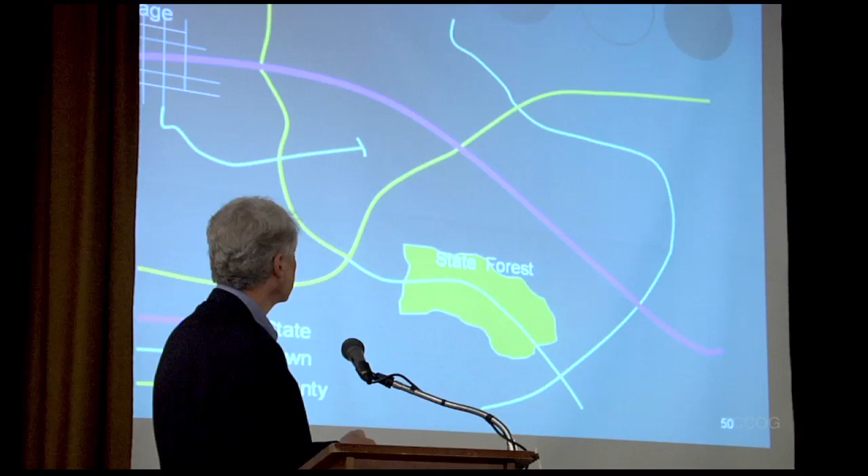So you need to be able to work with your other agencies. Not a good idea to get each other disliking each other if you want to get cooperation in situations like this.

Structural evaluation of the road can be done with this device, and we're going to have one parked outside the front door at the end of the morning, so you get a chance to actually look at it. But quickly, just for the moment, I'll show you how it works. There's no sound with this, so you're not missing something.

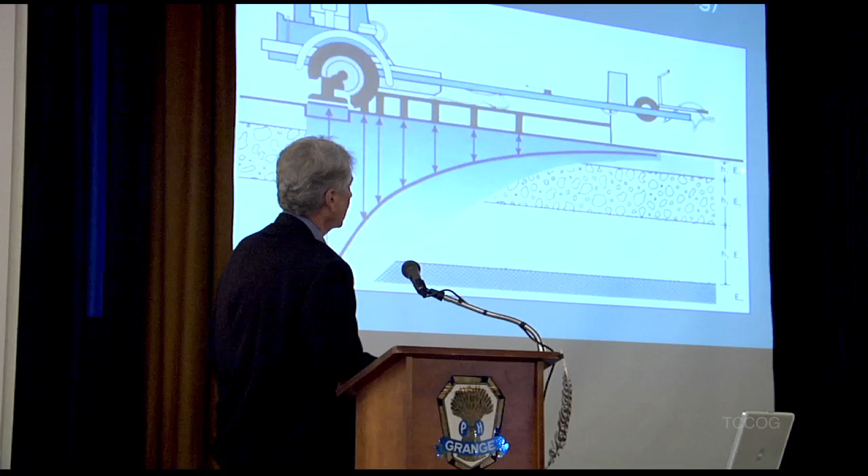So what we're after with this is we use this device to measure deflection, and this represents how the deflections distribute themselves with distance away from the center of the load. We need to know the thickness of the layers, which we typically get by either historical records or coring. And the property that we're trying to measure from this is these E values, modulus of elasticity, which can then be used to calculate the stresses and strains.

If you recall that diagram that I showed earlier of the wheel load with the tension in the bottom of the surface course and the compression on top of the subgrade, what we're trying to do is to come up with the information that we need to know about the road and its materials to enable us to calculate those stresses and strains.

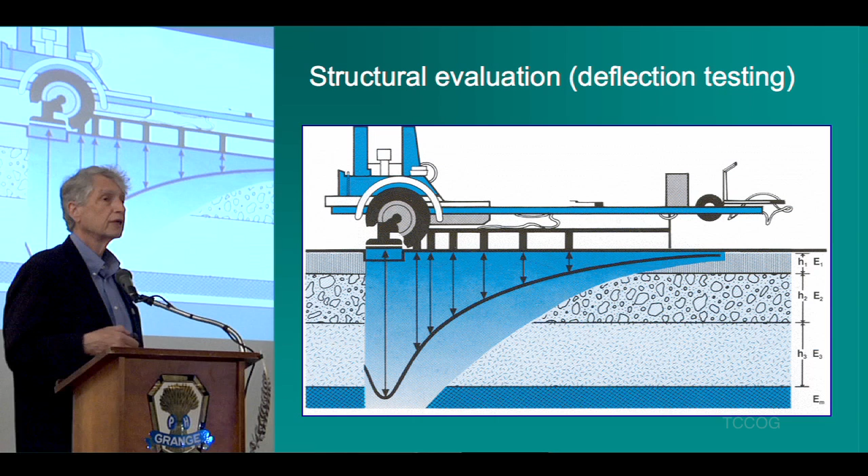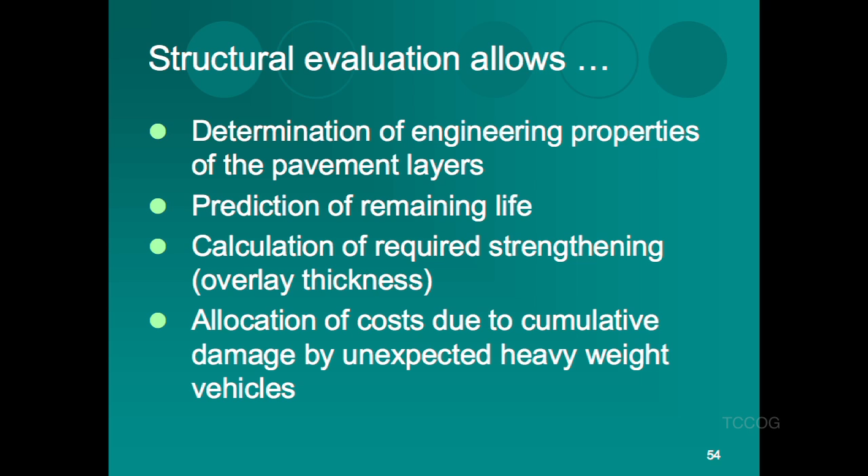So it allows us to determine the engineering properties of the pavement layers, predict remaining life, calculate required strengthening or overlay thickness, and it enables us to allocate costs due to cumulative damage by unexpected heavyweight vehicles. And that's where that paperclip analogy that we were talking about earlier gets put to work.

So in summary, what should you do? Establish a road use agreement, benchmark your roads before they get used, identify the strong and weak portions of the road system, post reasonable load limits for the roads that would be materially injured by a substantial increase in heavy trucks, identify acceptable truck routes to utilize the strong portion of your road system, and if necessary, strengthen some roads.

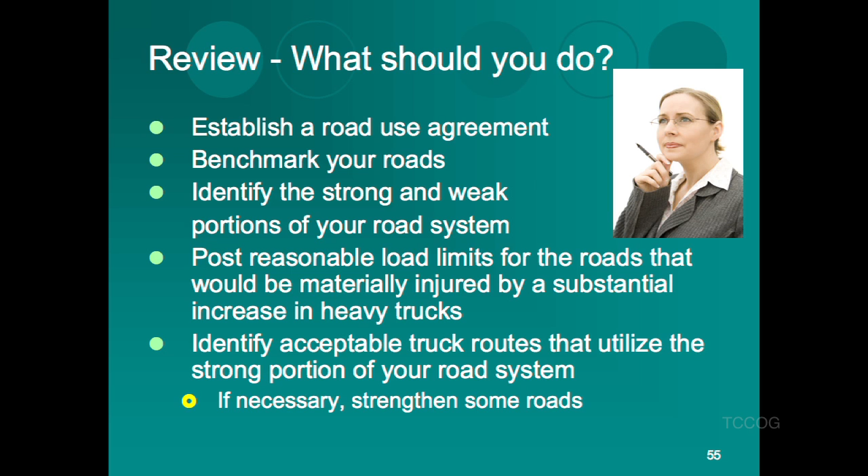Yes, sir. Something you touched on at the beginning about the seasonal variations. Yes. You're probably hoping this question wouldn't come up because I don't think the answer is a simple one, but we all agree that in the winter when the roads are frozen, you can obviously put more load on there. That's right. Last winter we had a long, cold winter. I think it was pretty easy to tell when the road was frozen and when it wasn't. It almost wasn't frozen this last winter. Right, this last winter. Yeah, this is where I'm going. Even in the Adirondacks, we didn't get much in the way of ground freezing.

Okay, so if you had a winter like this past winter, you're saying that the road, there pretty much wasn't any freezing down there. Okay. Right, and so heavy truck traffic in the wintertime, if you just categorically allow it without any limitations, and then you get a winter like we just went through, you could do a lot of damage to the road.

Okay. How would you, if we had a winter where it was swinging between 20 for a month and then 30 for a month and 40, how would you be able to track that, kind of figure out when it's frozen and when it's not? That's actually a very good question, and you're right. It is a somewhat complicated answer.

We were in the second phase of a very substantive research project at Cornell to come up with the ability to model the change in those E values with season of the year through knowledge of basic index properties of the material and knowing what the weather is, basically. And from those models, we could be able to deal with the different seasons of the year.